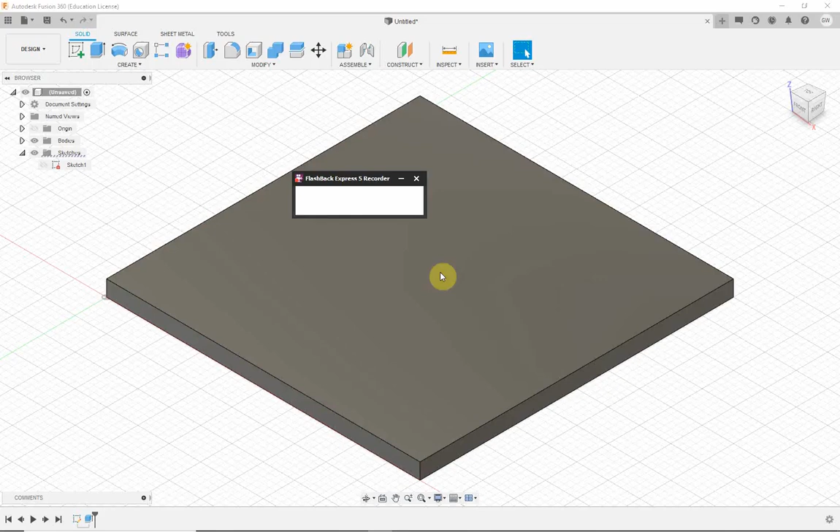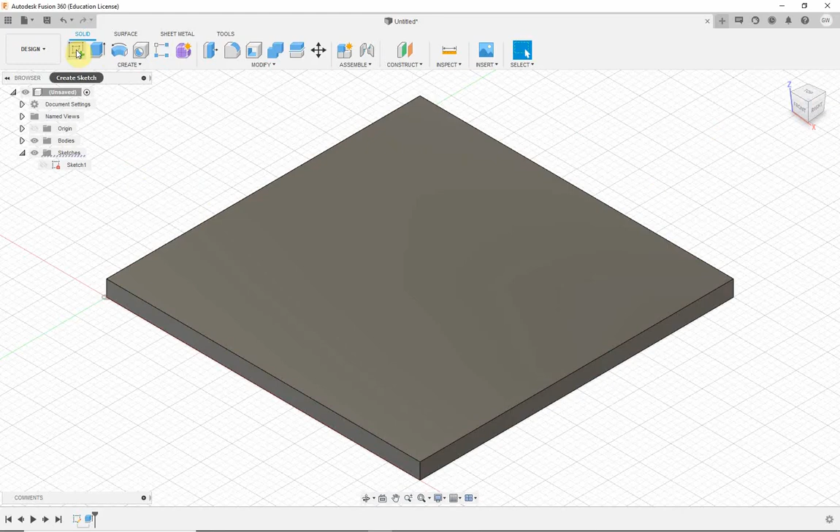What I've discovered is that some fonts won't let you extrude them or press pull them, mainly just because of the way they're designed, the way certain parts of the text overlap. But that's not really an issue, and I'm going to show you why, because you don't really need to extrude it. What we're going to do is start a sketch, and put it on this face here.

Make sure that face is highlighted. You notice how when I hover over it, it turns a lighter gray. And make sure this is oriented the way you want it.

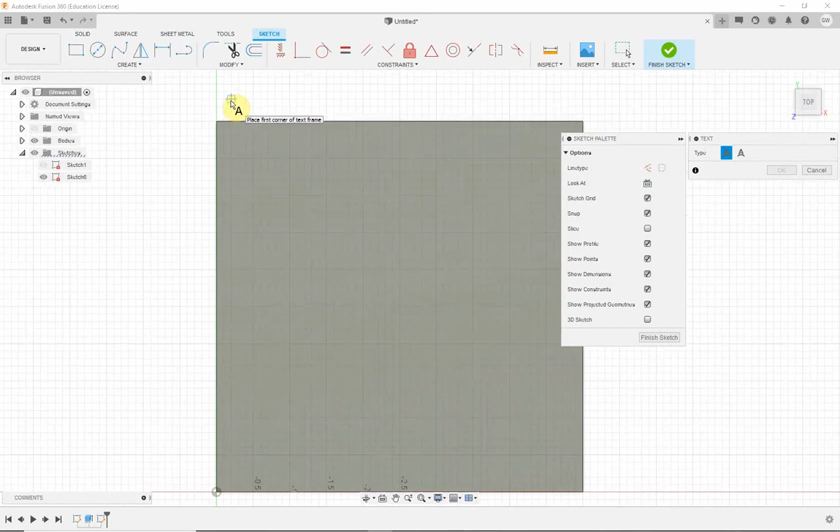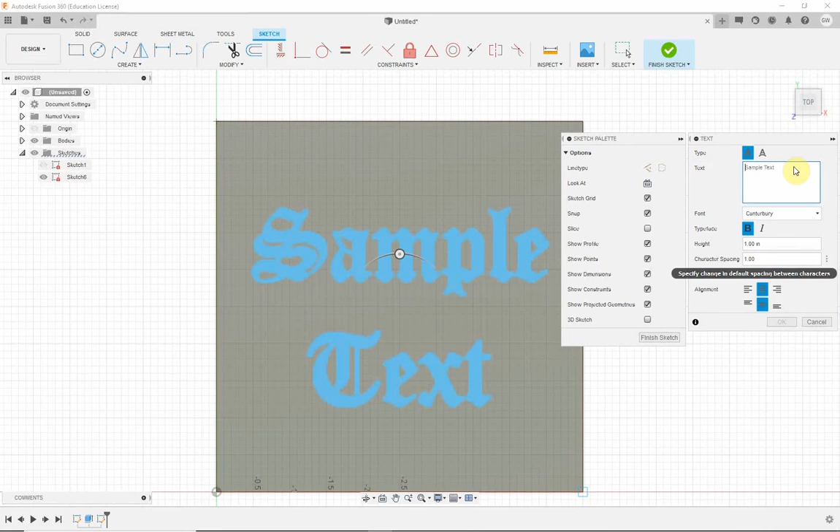Now we'll put some text on it, using a font that I found that I know will not extrude. We'll just center this. Notice how the cursor is that little blue box with the cross in the middle of it. If you want this text centered on everything, put it up on the upper left corner, move the mouse down to the lower right corner, and then click the mouse button, and you can start putting in your text. Whoops, I don't want it all caps.

Start putting in your text. We'll change this to, say, this font that I know will not extrude, and that's why I want to show you this. I'm going to leave everything pretty much just the way it is.

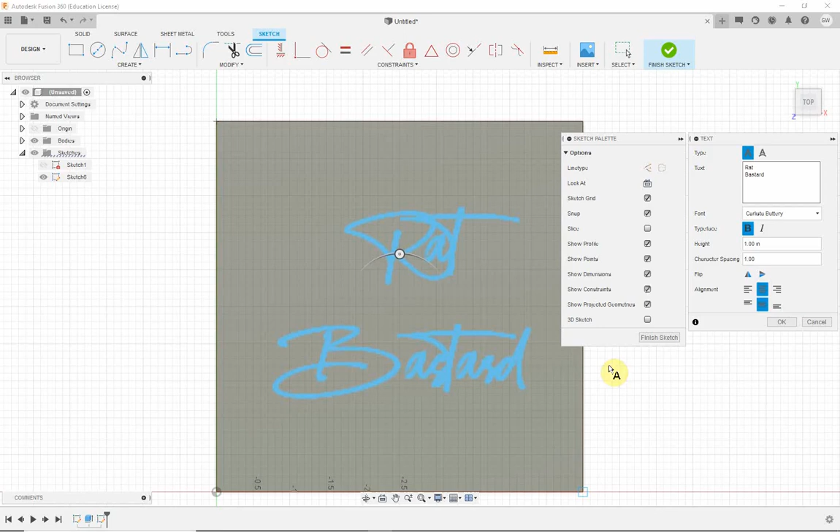If you want to get it centered, notice I've got this one here where it centers the text to itself. Then this one here, it'll center the text up and down inside the parameters you laid out when you first made the text box. Alright, we'll just click OK, then click Finish Sketch.

Now we want to engrave this into that metal. So over here where it says Design, click on that, then click on Manufacture, and this is where you generate your G code. You have this, and what you want to do up here is create a setup, a new setup, and here's where you start defining things that you will use.

Number one, you should select a machine. Now I've already entered in my Fox Alien machine, so I just select that one. You can call me and I'll tell you how to go about getting it in there and stuff like that.

Before I do anything else, I go over to stock. Now this is a fixed size box. You can use a relative size box, but in this case we're using a fixed size box since we're not machining down the box. It's already the size that it is, and we're going to leave the box that size. So it's a fixed size box.

For some reason this always defaults to 1/2 inch thick. The rest of the stuff, 5 inches by 5 inches, is correct. But I remember specifically we made this a 1/4 inch thick box. So I'm just going to type 0.25 in there.

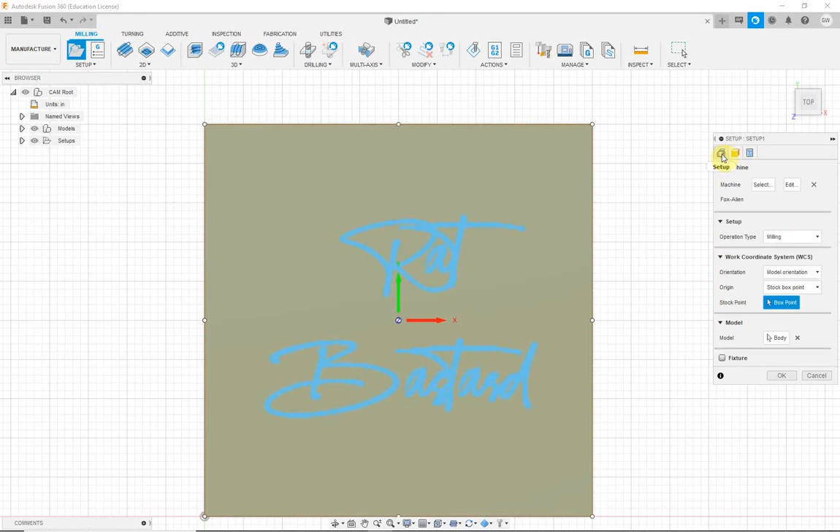Then go back over to this here, and you want to select your 0 point of origin. If we put this askew a little bit so you can see it, you'll notice these white dots all over the place, in the middle and in each corner and in the very center here. You want to select one of those to be your point of origin.

One of the better places to do most stuff is with this one that lies right on top of the stock in the lower left hand corner. So for right now, you just click on that.

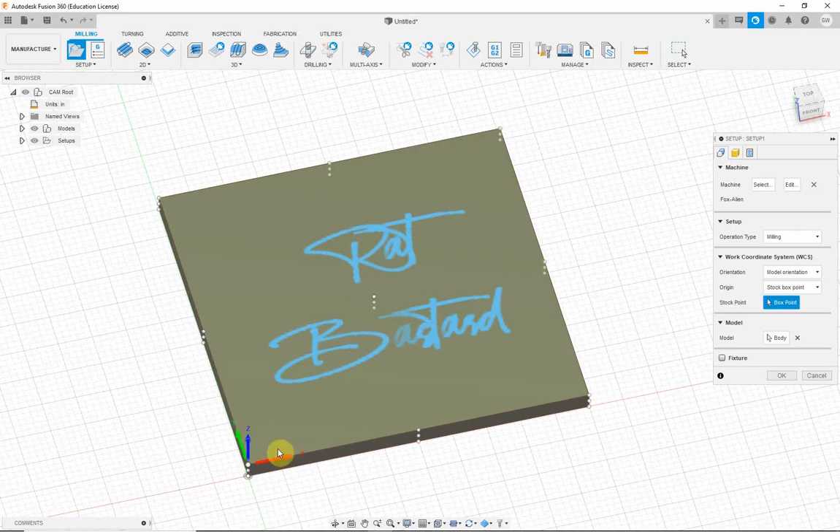You'll notice you have your axes arrows here. Your Z axis should be pointing up, and if you move this around, you'll notice that it is pointing up. And the other ones, it's best to have the positive. This shows you the positive. So your positive X is going to the right, which is correct. Your positive Y is going back here, which is correct. Then that setup is pretty much done.

One of the things I like to do is on program name or number, I like to change this. And what we're going to do is call this engrave test. You can put in there whatever you like, and you'll see where that'll come in handy here in a minute.

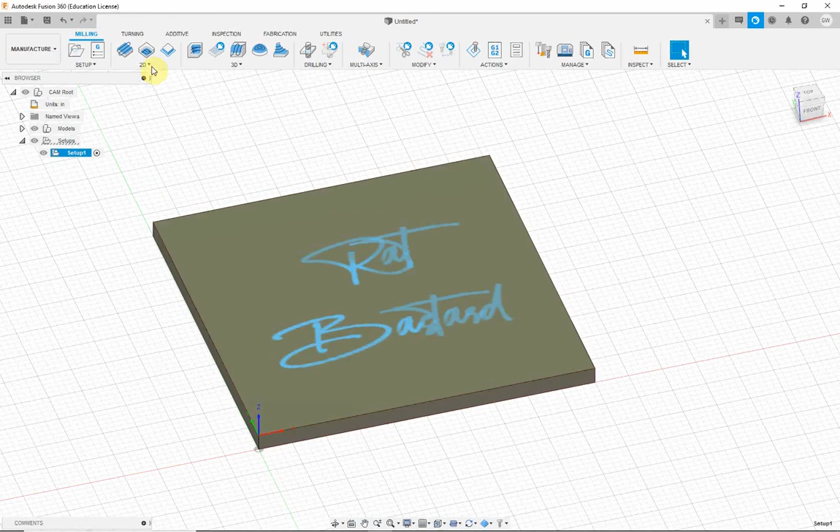Click OK. Now we want to engrave this. So in 2D, down here to engrave, you see it's got a little picture there of a tool carving on some text, and lo and behold, that's kind of what we want. So we'll click on engrave. Over here you want to select the tool, and I'm going to select one of my V bits just for grins. Let's see here, we'll just go with the engrave chamfer bit.

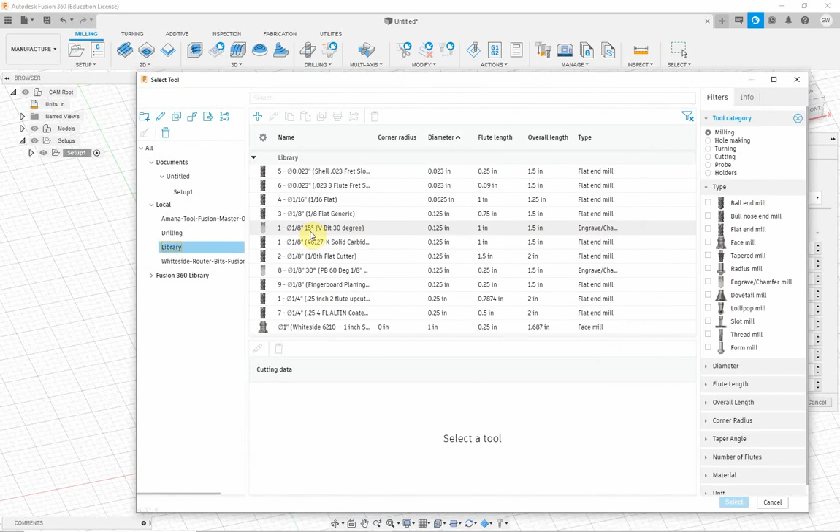It's a V-bit, 30 degree. I happen to know that's one of the generic ones that came with the Fox Alien machine. Now you notice it puts it down here. If you want, you can edit it from up here, but let's not get into all that right now. Let's just accept that this is here, and we'll go select.

Now we've got our bit. It's kind of hovering over the thing. You can change your feeds and speeds down here, and we'll get into that later. You don't want to really get into that right now because that will be a much longer video.

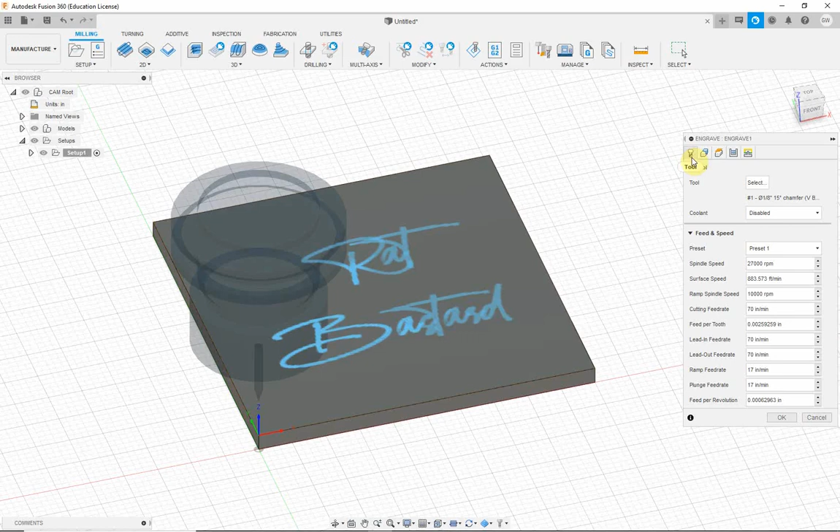The next tab right here, notice this is the tab that we're on, where it's got a little bolt there. It looks like, I guess it's supposed to be a tool, but to me it always looks like a screw or a bolt. But at any rate, the one next to it is where you define what you want to engrave.

So you click on that, and contour selection. Start selecting contours, and all those contours are pretty much selected at this point.

Now we go over here, and these are the different heights, like the bottom height - right now it's defining it. Well, let's go through these from top to bottom. Your retract height, that's where the bit is going to rise up to as it goes between cuts. Clearance height is where the bit rises up to when it heads from the point of origin to the first cut.

Feed height, I'm not really sure. If you hover it over it though, it'll tell you exactly what the feed height is. So it sets the height that the tool rapids to before changing to the feed plunge rate, and so on and so forth.

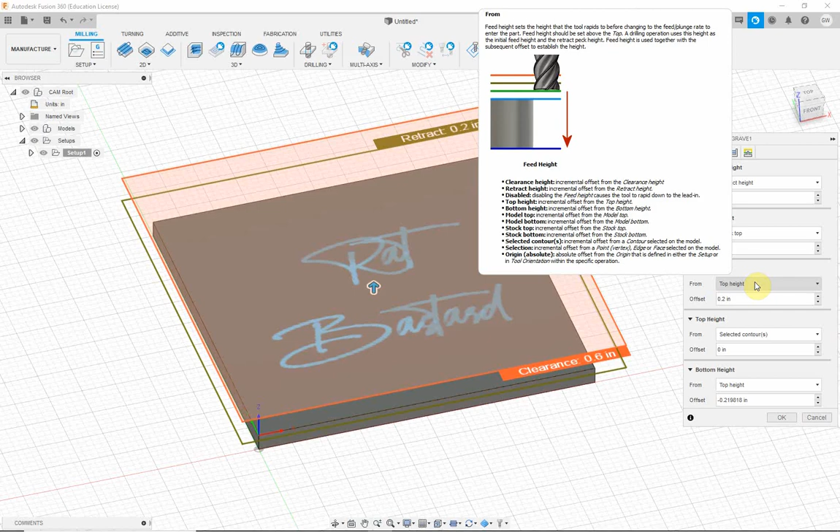The top height, you can go from selected contours. I usually like to use the stock top for the top height. And the bottom height from the top height is a good place to start.

But let's say you want to make it, it's at 1/4 of an inch. Let's say we want to engrave that down 1/16 of an inch. So we'll put in a -.0625 for 1/16 of an inch. Then that's where it'll stop engraving.

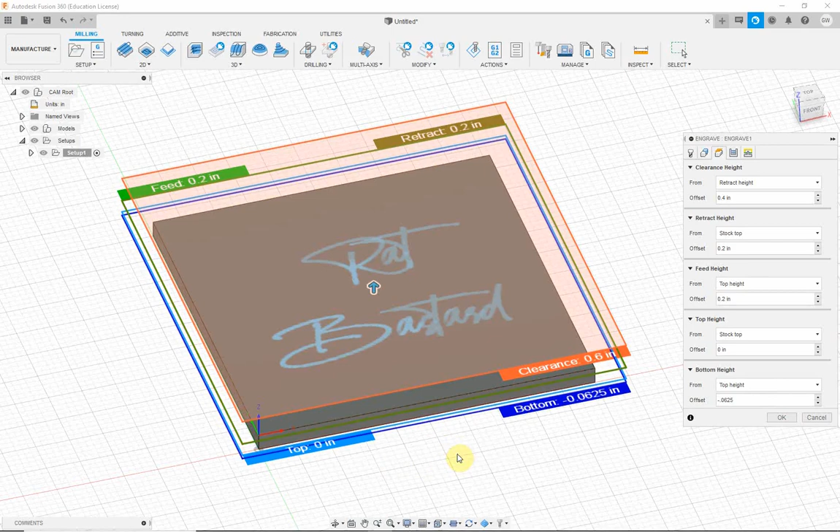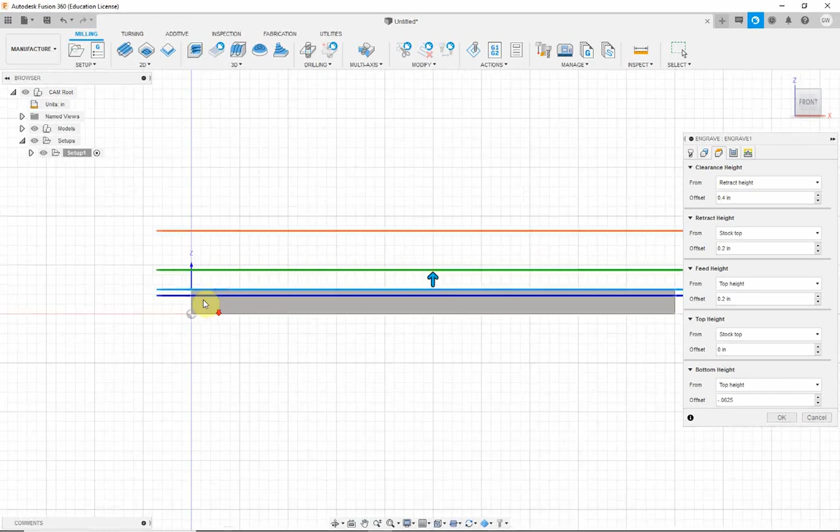If we look at this on the side, notice the one in the color of the one that says bottom. That you notice is - look at the dark blue one. It's going to be hard to distinguish. See where that lies? That would be roughly 1/16 of an inch if you measured it out. But that's what it wants to do, and that's what we told it to do.

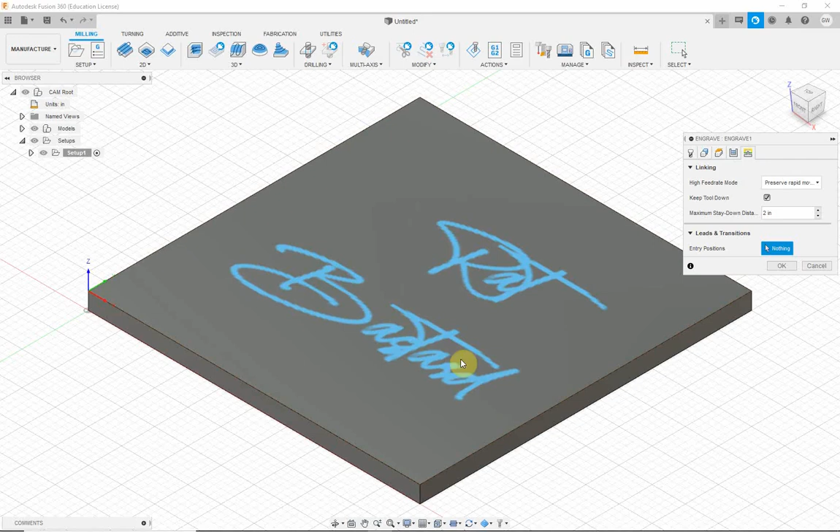Over here, these are passes. You can set the number of passes if you want to do multiple depths. You can set all that in here. We're just going to leave this alone for right now. This is the thing where you can set how the bit enters the piece and stuff like that. We'll just leave that like it is for right now.

And this should generate a path here in just a second. Now you notice it's got all the yellow lines. Those are the retract heights as it's jumping between the different paths.

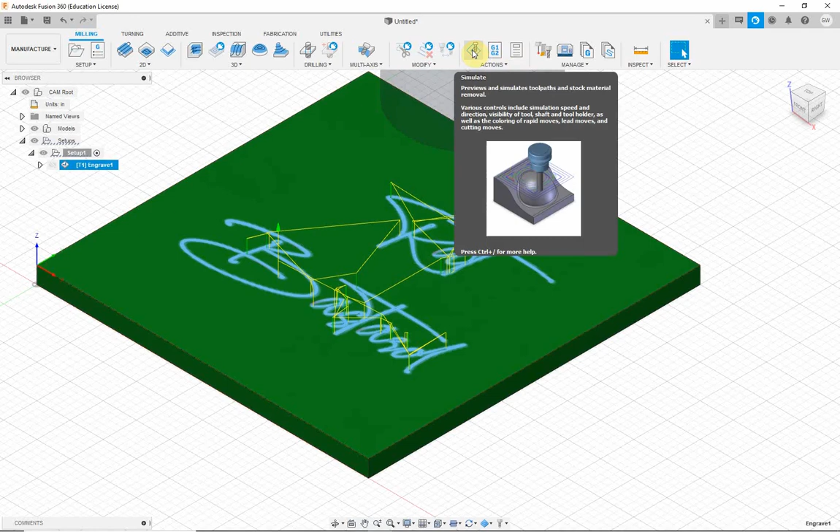What I really like about Fusion is it has a great simulator. Up here where it says actions, you'll notice this thing is supposed to be a tool, but like I said, I think it looks like a screw. But at any rate, click on that - that's for simulate, and you'll get this screen.

The stuff over here on the right now we can just ignore. It'll be stuff that you actually - let's change one thing here where it says tool. It has holder. Just click on that arrow and change it to just flute. That way it'll just show you the actual tool, not some hypothetical holder that you probably don't actually have, because I know what kind of machine you have. I know you don't have one of those holders. This will just show you the actual working bit.

Now this down here at the bottom of the screen are the play buttons for it. There's a speed control, fast forward, fast back, all the way, reset all the way to the front or all the way to the back. Let's try running this and see what it does. And it's busy carving out.

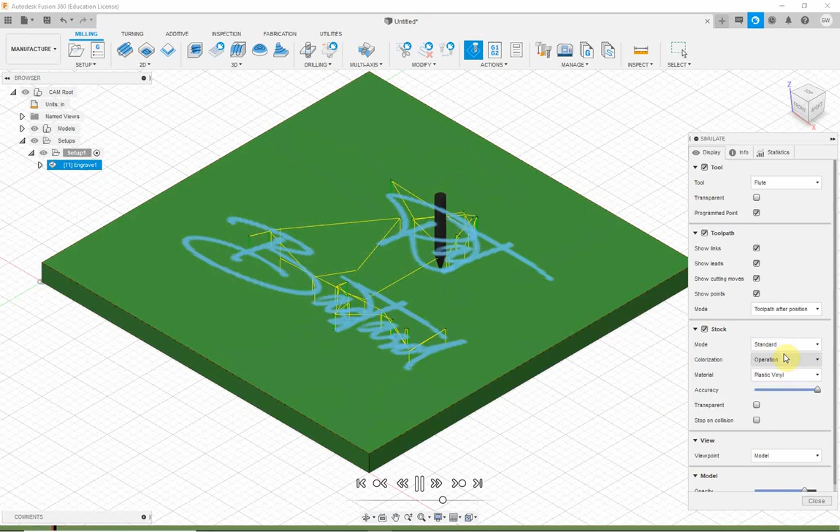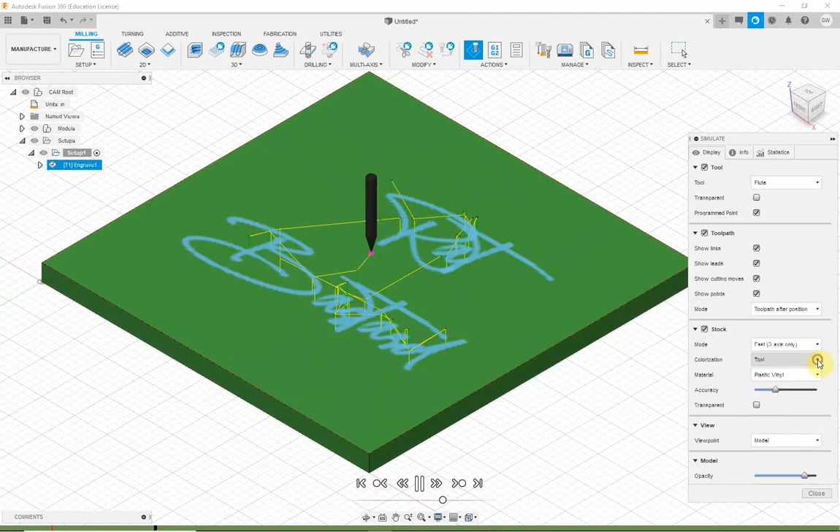Now while it's doing that, there are things you can do here that will help you visualize what it's doing. Like you can change the mode from standard to fast, 3-axis only, and I've never really noticed a big difference in that, so I don't know what good it does. Colorization, you can color the material like this and look at it that way. You can color the tool and look at it that way. Like I said, there's a lot of different things you can color in there in the colorization.

Sometimes the material is a good thing to color, because it just looks cool. You can make that material transparent if you want, and it'll look like that.

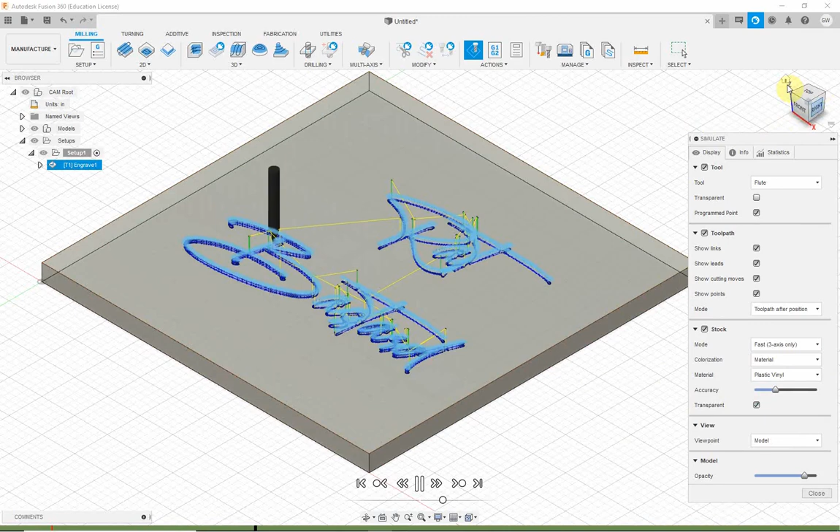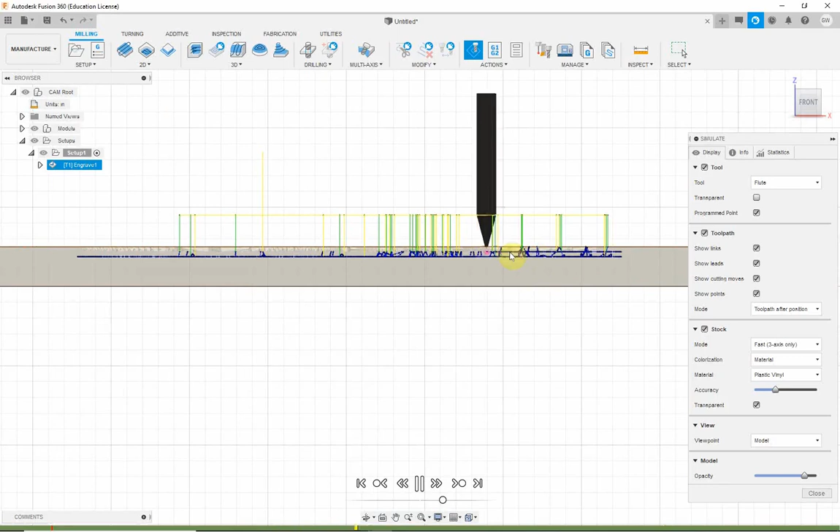One of the things that's really helpful I like to do is while it's running, click on the front up here on the cube. Click on where it says front, and that'll give you an idea of how it's carving down into the material. It looks like by default on a lot of the stuff it's taking 2 passes. You see where that little pink ball is there? That's showing you it's taking this path, and it's going to take all of this top blue stuff off first, and then it'll dig down a little bit farther and take off everything on the lower level of the blue stuff. Like I said, that's really helpful.

Now, if you wanted to speed this up, you can just move that slider down here over a little bit, and all of a sudden it gets real fast. We'll look at the front again and see what it's doing.

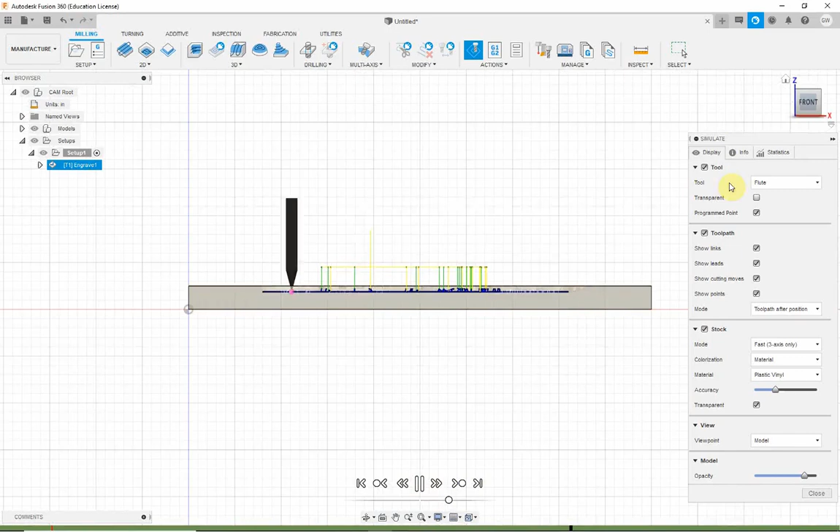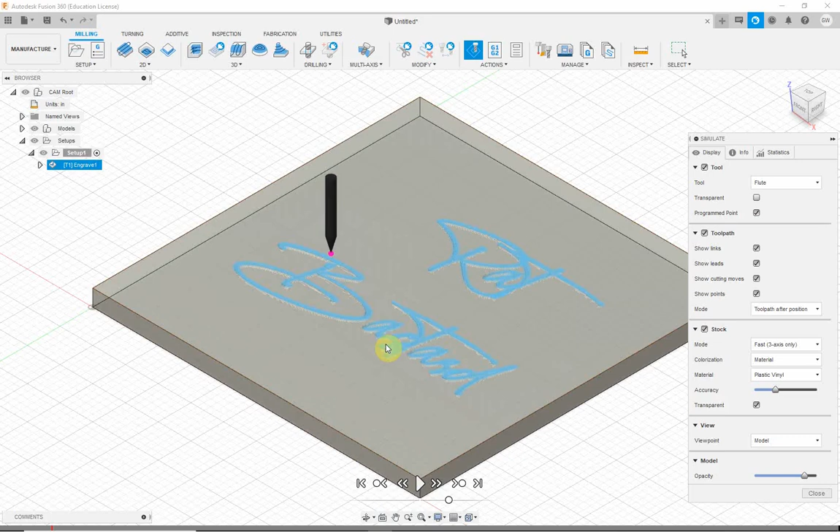Also, one of the things this will do pretty much naturally is as it comes out of a letter, it'll come out in such a way that it'll leave a sharp point in the letter, and you can't really see that in the simulation, but when it's actually engraving, it pretty much should do that. There's lots of different settings you can set to control that. I don't know for sure that we've set it to actually control that, but typically that's what it does. It'll ramp up out of the letters.

Now these letters aren't really very sharp to begin with. If we close this, pretty much, since that's a V bit, if you carve that on a piece, you would see the sharp point of the V bit running along through the center of all these letters. And depending on how thick the lettering is, the strokes on the lettering would depend on whether or not it has to do clearing out of there, or because of the size and shape of the V bit, it'll just need to go through the center of it. And so those are all variables.

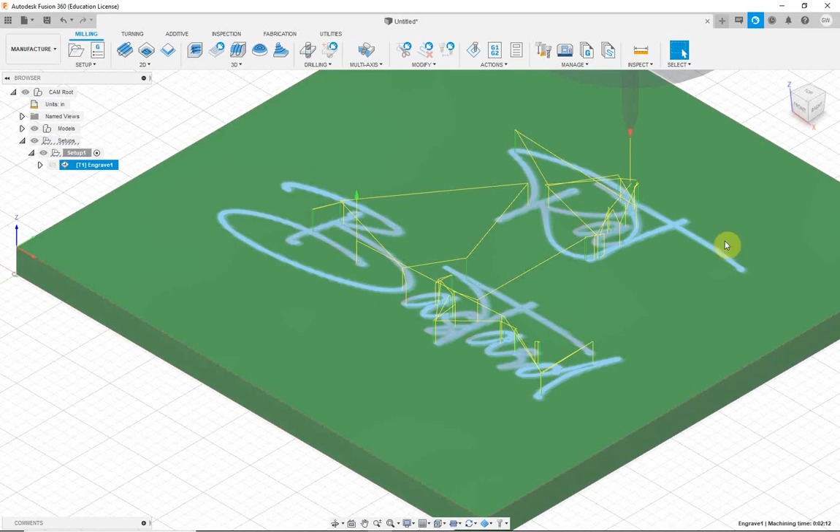I would suggest when you start doing this, instead of wasting metal, get some cheap scrap wood. MDF is a good one to use, and just put it in there and see how it carves on it, and see what kind of results you're getting before you actually start putting a bit to the metal, because that's more expensive.

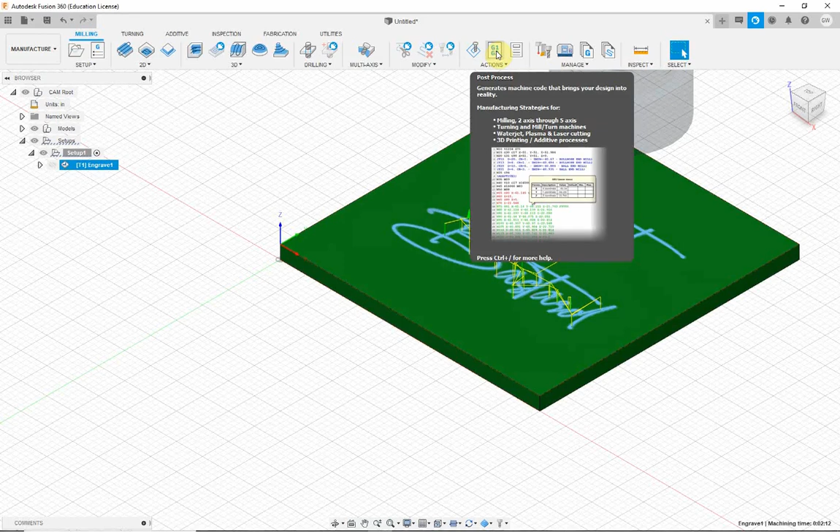Any rate, so let's say that you've done this and you like the way it looks and that's what you want. Then you go up here to actions, and where it says G1, G2, that will process your G code. So if you click on that, pretty much you need to know where it'll leave this part alone. This is where the configuration folder is. That's going to be just fine.

You might want to change your output folder to a directory that you will be able to get to and find easily without having to dig and search all over your hard drive. So that's a good way to do it. These little buttons will let you browse for a folder. I have a G code folder I like to use that'll save it to them. And an extension, for the most part, you'll be using .nc.

There's the program name. Remember when we typed that into the setup. You can change this at this stage to anything you want, really. You don't need to keep it Engrave Test.

I have this set where I have another editor that will automatically open when it gets done posting the G-code, which is why this box here is checked.

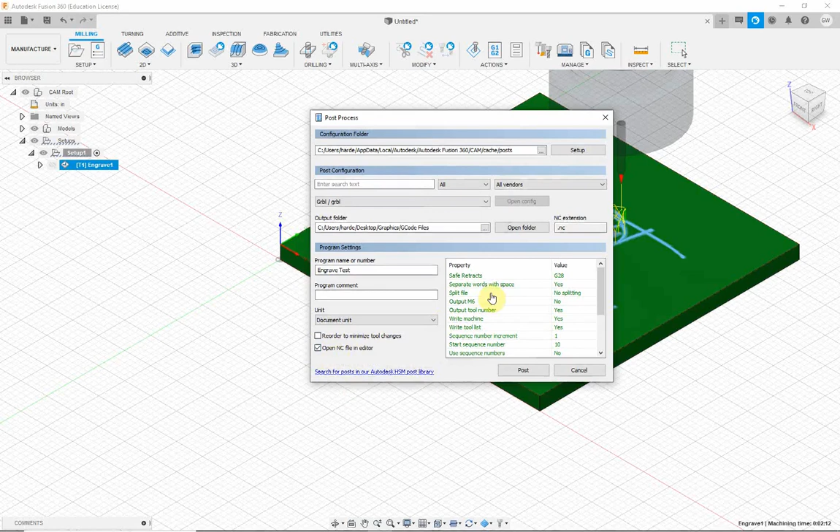So if we click Post, then it'll ask you again for the actual file name, and it'll ask you to put it in that folder that you defined. Or you can change it to a different folder at this point if you want to. Or you can change the name again if you want to. It's all up to you.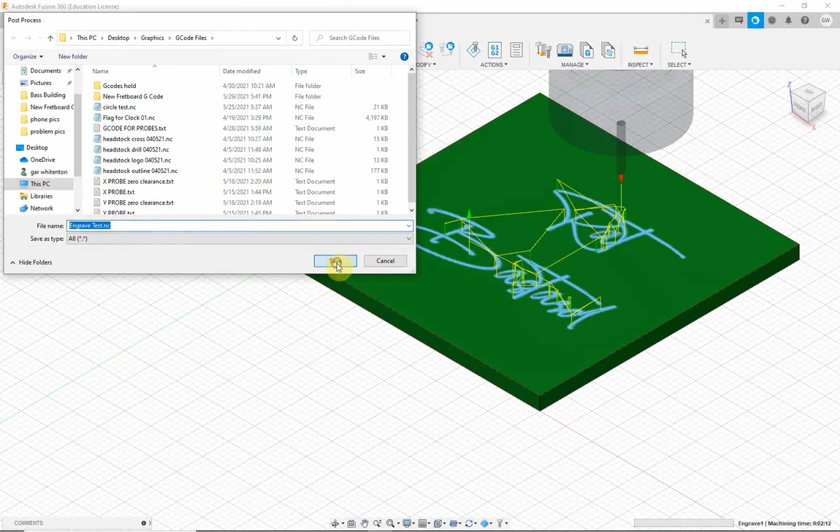Let's just click Save, and this will take just a second to post it. And here comes the editor that I told you about. You can set up one of these editors too. It's pretty easy, but it's nice.

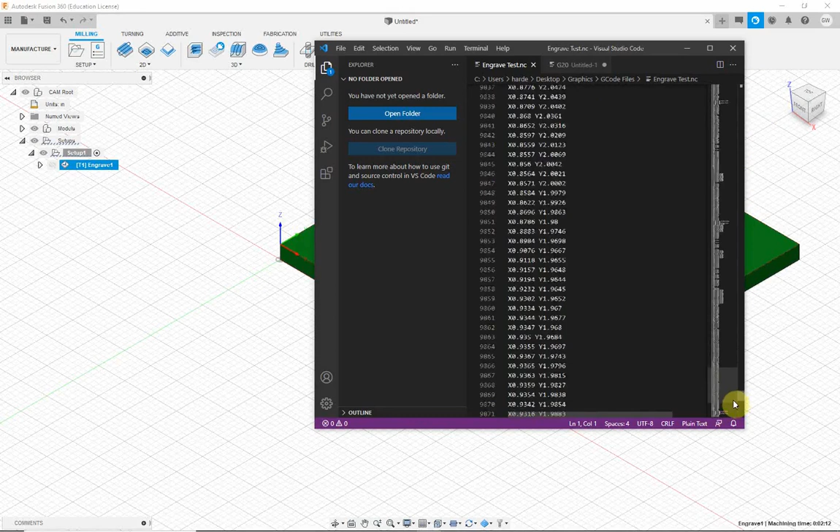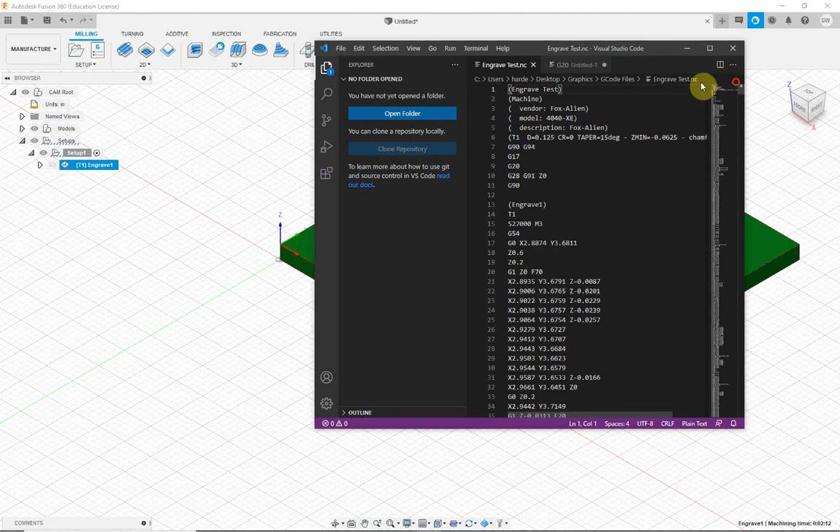I like to look at the G code that I just created. I'm not an expert in G code. I do know a lot about it, but I'm not an expert. But you can scroll down through it. For one, I like to see how many lines of code I generated, and in this case 10,389 lines of code that it generated up to the end program, the M30 command, which ends the program. For just a simple engraving like this, that's actually not too bad. Engravings can take an awful lot of G code. Simple stuff like if you just drew a line, it's very simple G code.

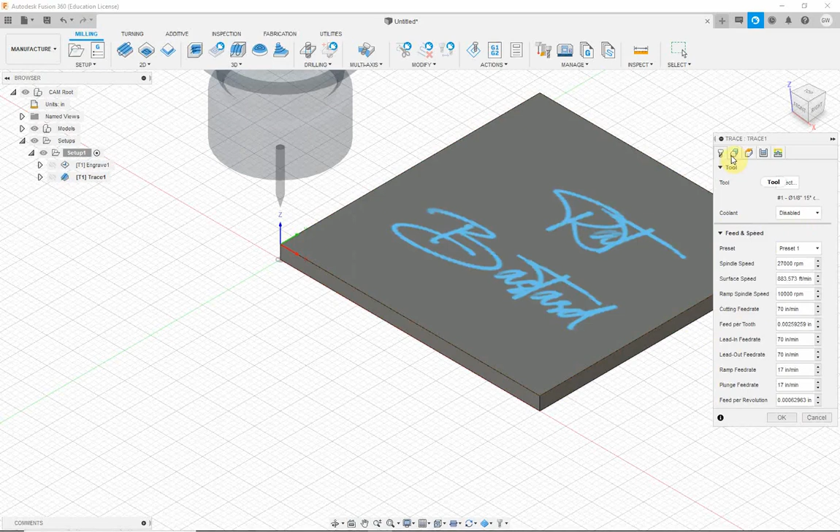If you wanted to trace this, we'll do another 2D trace. That'll be a lot different. We'll leave the same tool on there, and we'll select this stock just like we did before. Everything else we're going to pretty much leave the same, except for a place where we need to change it. This is all good.

Don't worry about feed height and all these for right now. Over here is where you can set how deep this is on a trace. See, it's a little bit different than the other one.

So what we will do is set the axial offset, that's how far down you want to send the bit. So let's send it here, minus 0.0625. That's a 1/16 of an inch.

And then we want to do more than one pass. Let's say we want to take it in 2 passes or whatever. You can also have the maximum step down. Let's say we know that bit, and we know that the maximum it'll step down is 0.04. So it's going to take two steps.

And we don't want to order it by depth in this case. We want it to pretty much concentrate in one area, finish it, and then move on to the other area, so we'll take away order by depth. Sometimes it's helpful, sometimes not. In fact, in this case it's probably good to have it on, but we'll just see what happens with it off. You can do both up and down milling.

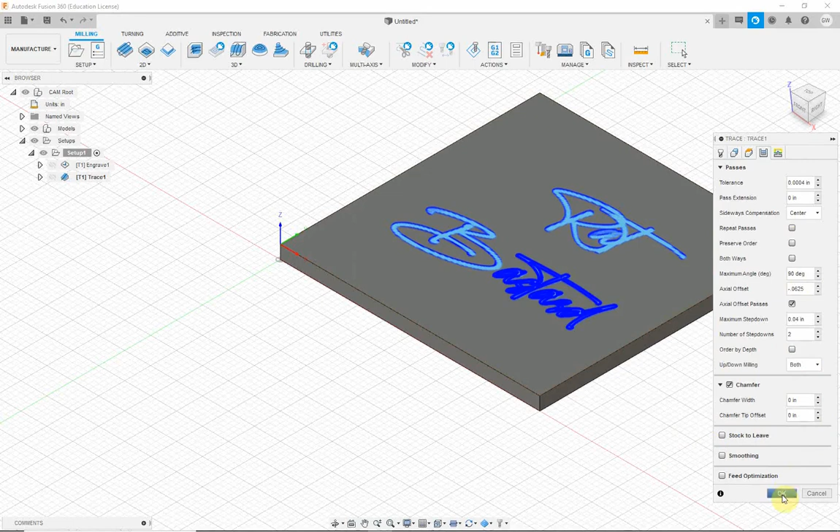You can set chamfers, but you don't need to worry about chamfers. Stock to leave—if you want to leave stock, you don't need to worry about that right now. This is just to get you going. We'll ignore this tab again and just click OK. It'll take a second to generate the path.

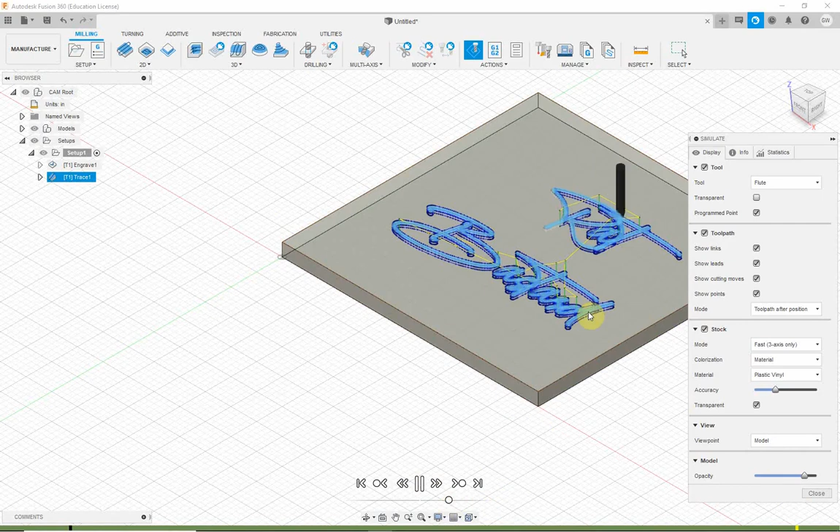Let's see up here, the simulate. We'll see how that simulates. Now you notice it looks a little different. It's going to go by real fast, so I'm going to slow this down just a little bit. Hit the play button—that might be a little too slow, so we'll speed it up and watch it do its thing. One of the things that's nice to do on trace, especially, is look at it from the side.

Now for some reason, you notice this top line's a little above the stock, and then it's got the two below the stock. That first one will actually start cutting something—the tip of the bit will actually be going into the stock. That's hard to describe, just kind of ignore it.

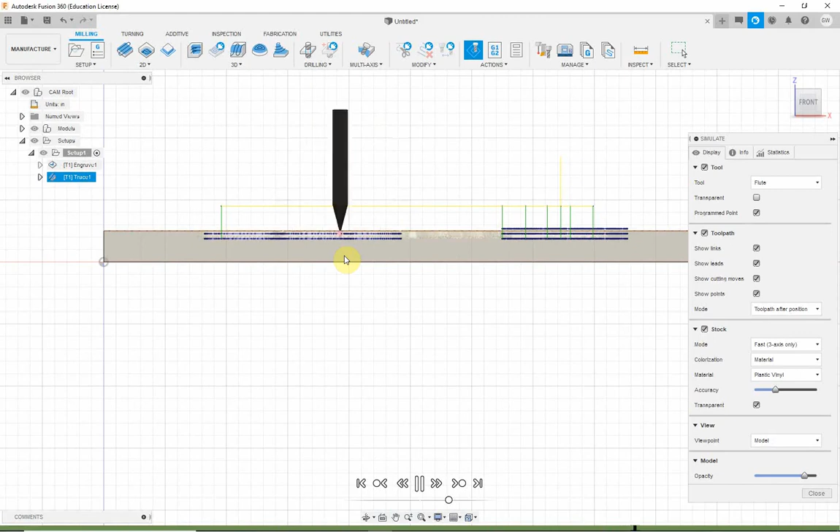And you'll notice also, since we took away order by depth, we can run through that again. Watch, it'll carve out this section first until it's done, then it moves over to the next section until it's done, and it'll keep doing that till it's done.

Let's close this. Let's go over here to trace and we'll edit that. Then we'll go over to here and order it by depth this time, and you'll see the difference in what it does and how it does it.

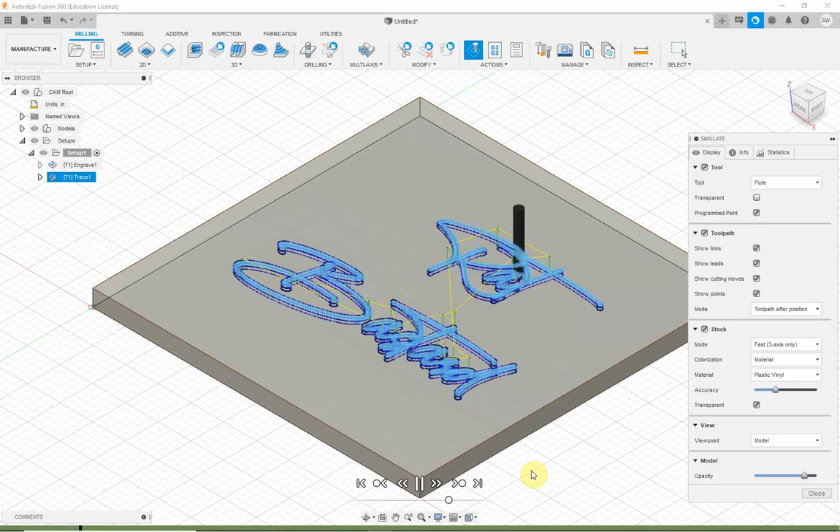We'll go back up here to simulate and then we'll play it. Now if you watch it, you'll see that it will do the entire face, one pass across the entire face, and then it'll do the second pass across the entire face, and then the third pass across the entire face.

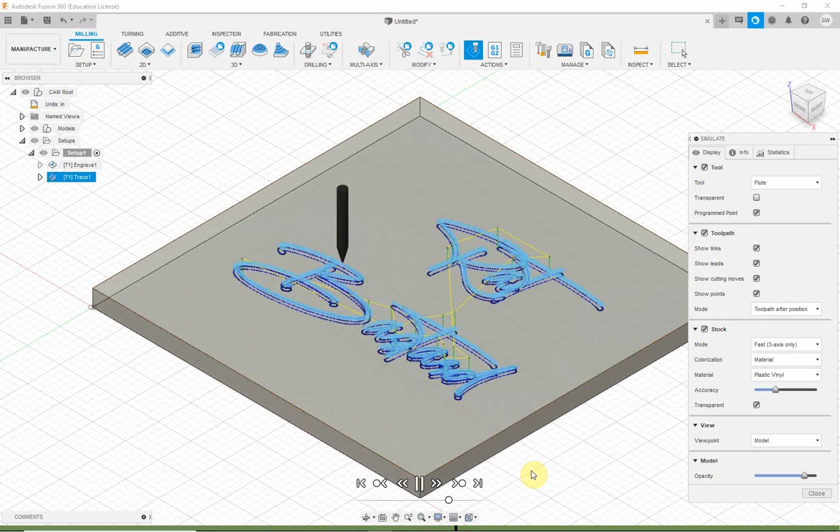So at any rate, while waiting for this to finish, I hope this video helps you.

And like I said, don't worry if you can't extrude the text, because you really don't need to, since you're going to be carving it anyway, and it'll carve out just fine. This text, I tested, it will not extrude. It gives me the same error message that you were getting when you were trying to extrude your word that said welcome. This was behaving just the same, and I found a few others that were the same, like Canterbury—it won't extrude.

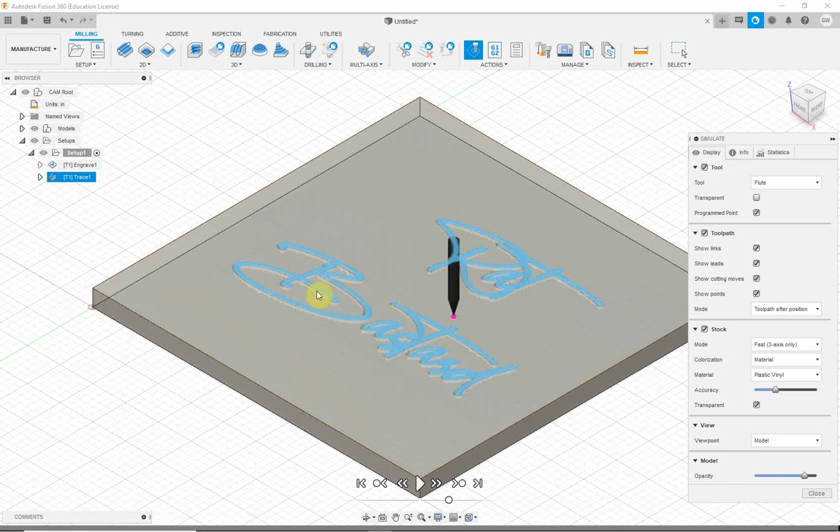Most of the scripts won't, just because of the way they overlap and intersect. Most of the regular plain type of fonts, like Times New Roman and Arial and all those, will extrude. So basically, if a text has overlapping areas like this, it probably won't extrude. You can always try it. And if it doesn't have overlapping areas—and most likely it will—in either case, it'll all carve out, it'll all engrave, and that's all you need to really be concerned with, because that's ultimately what you're doing with it.

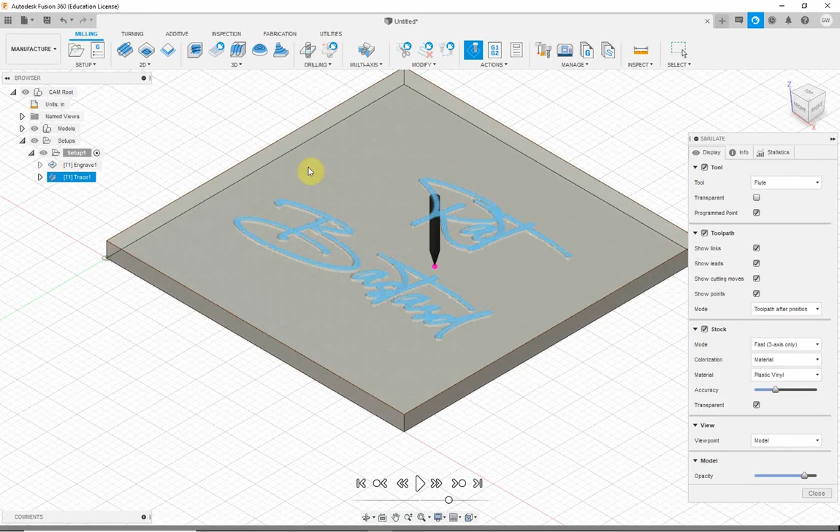So it would be nice maybe to see what your extruded text looks like, and sometimes that would come in handy, especially if you're making raised letters. You'd want to extrude it up out of the piece and then tell it to face off the stuff surrounding the letters. Let's close this.

And that's basically it. Like I said, hope this helps, and I know you'll have questions.